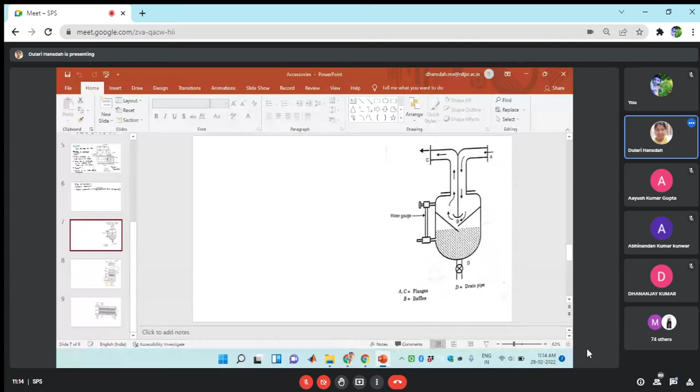Okay, so last class we were continuing superheater. So superheater, we have discussed this diagram. So there we are having the U type superheater. So both the ends are closed with the help of the headers. So one side there will be the supply of the wet steam. This is the steam inlet through the headers.

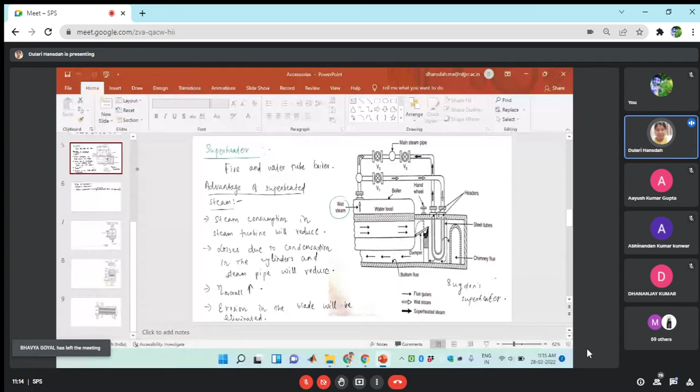So it will take the heat from the flue gases. So here a damper is provided so that proper direction of the flue gas will be achieved by the help of this damper. Okay, so by taking the heat from the flue gases, that wet steam will be converted into the superheated steam, which can be collected at the valve, that is V2, when it is required.

Then here we are having the two valves, V1 and V3. So sometimes if there is a requirement of the wet steam, then that time this V3 valve will be open, but V2 will be closed. And when your V2 will be supplied, that time V3 will be closed. So this is all about your superheater.

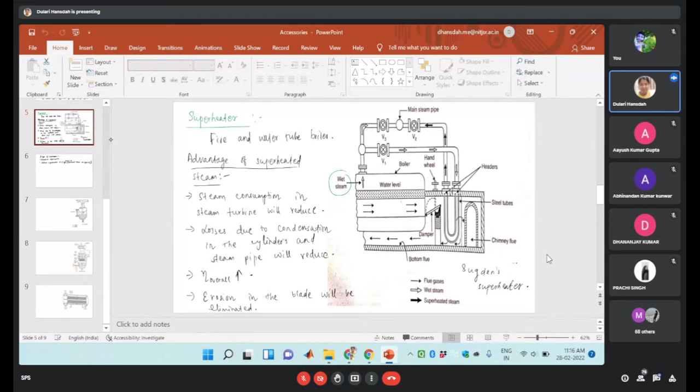So there we are having the two types of superheater. One is the convective superheater, another one is the radiant superheater. As the name is given, convective superheater, so that heat transfer will be the convective process. So this type of superheater will be placed outside of the furnace, and the flue gases will be used to increase the temperature of the wet steam.

And in case of this radiant superheater, it is placed inside the furnace, and this type of superheater is used when there is the requirement of a high amount of superheated steam. Okay, so the heat transfer will be the radiant process. Okay, so then we are having this, the steam separator.

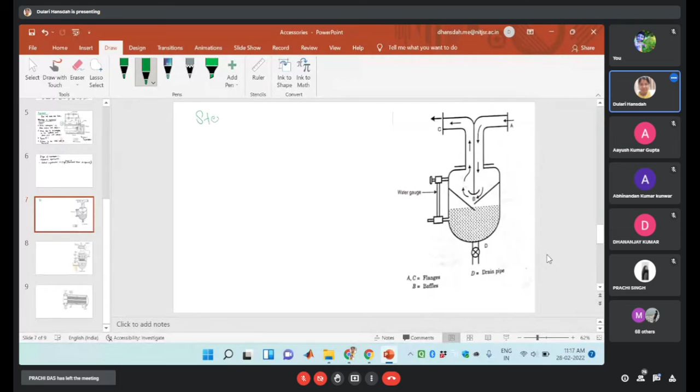So steam separator, why is it required? So sometimes there will be moisture content in the steam. So to remove that moisture content or water content from the steam, these steam separators are used. So a boiler will provide you different types of steam. So those are your wet, dry, saturated, and superheated steam.

Okay. So if it is the wet steam, when this wet steam is supplied through the long pipe, what will happen? It may condense in the pipeline when it is reaching the turbine. So in that case, if that steam is condensed, that will stick to the surface of that pipe, or when it is going to the turbine, that moisture content will stick to the turbine blade.

So it may pose some risks to the turbine blade, or there will be corrosion on the turbine blade. Because of that, the use of this type of steam will be uneconomical. So we have to use the steam separator before the turbine itself, or near the turbine. In this case, it will remove the entrained water particles which are present in the steam.

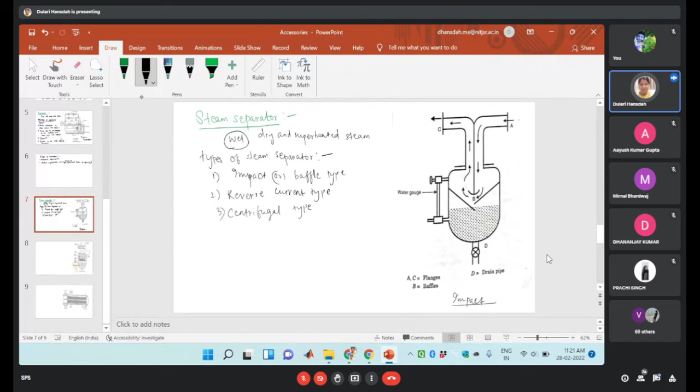The first one is the impact or baffle type. This is the example of your impact baffle type. The second one is the reverse current type, and the third one is the centrifugal type. This is the impact type of steam separator. In this case, A is the steam inlet, and B are the baffles. First the steam will enter through this pipe, it will strike the baffles, and the low density steam will pass through another tube, that is C, and then go directly to the turbine.

If we observe, at the lower place there is a drum where the water or condensate can be collected at the lower position. When the steam strikes the baffle, the high density water or condensate will be collected at the lower portion. Then high quality steam will be supplied to the turbine.

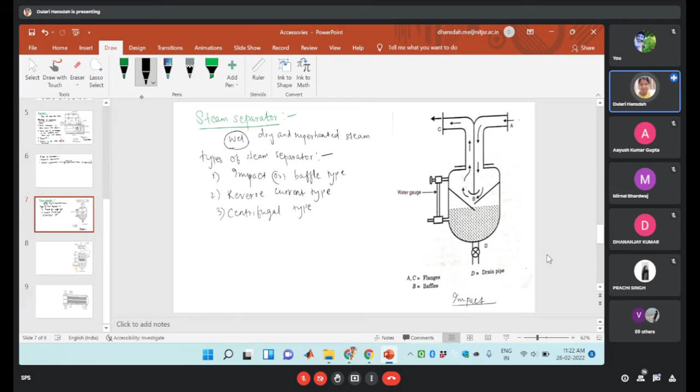There will be a water gauge. It will check the level of water or condensate formed inside the drum, and that will be drained with the help of the drain pipe. D is the drain pipe. So this is the simple function of the steam separator, the baffle type or impact type of steam separator.

Next, we are going to discuss feed water heaters and evaporators. I will only discuss the definition; I'm not going into details. Feed water heaters are required at the inlet of the boiler. Most thermal power plants are designed so that whatever condensate is formed will be circulated inside the boiler itself. Before the feed water enters the boiler, its temperature can be increased so that fuel consumption is reduced and the efficiency of the boiler is increased.

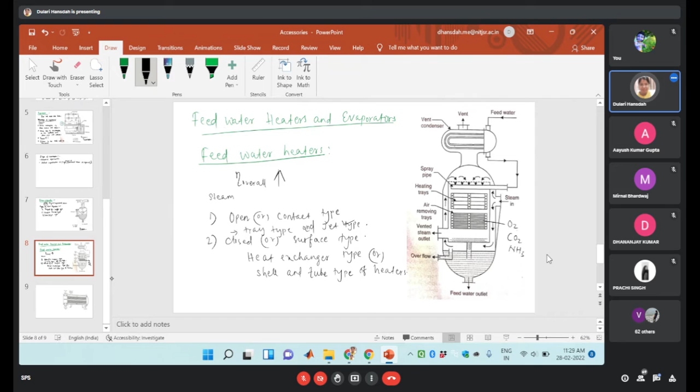So this is all about your accessories. What are the accessories? First one is the feed pump, then we have discussed the injector, then the air preheater and superheater, steam separator, economizer, then feed water heater. Last one is the evaporators.

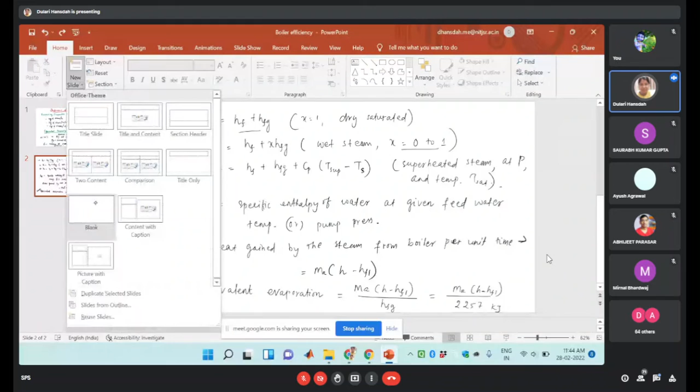So next one is the factor of evaporation. Factor of evaporation is expressed in terms of Fe. So Fe is equal to (H minus HF1) upon 2257. So it is the ratio of heat received by 1 kg of water under given working conditions to the energy utilized to convert 1 kg of water into steam at 100 degrees Celsius. That is the factor of evaporation. In this case, Ma is taken as 1 kg. So that is the factor of evaporation.

Then we are going to discuss the boiler efficiency. Boiler efficiency is the performance parameter of the boiler. It is represented as a ratio, the ratio of the heat actually utilized in the, sorry. Okay, so boiler efficiency is the ratio of heat actually

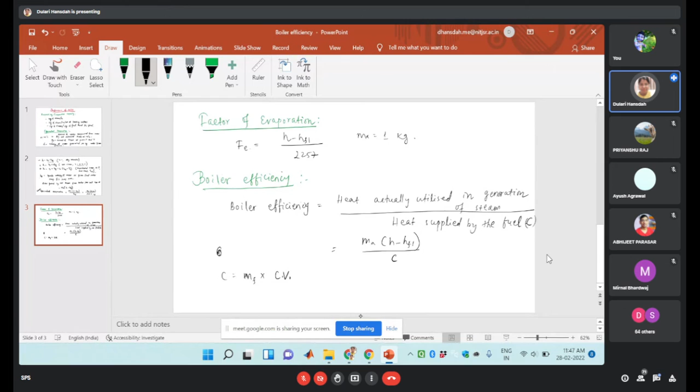fuel. So heat supplied by the fuel can be represented as C. Let me write it like this: Ma(H minus HF1) upon C. So C is mf into the calorific value of the fuel. This is the heat input, the heat supplied by the fuel. Ma, as you all know, is the mass of water actually evaporated into steam, or the mass of steam generated. So by using this formula, you can find the boiler efficiency.

So next one is the heat losses. While discussing the performance of the boiler, we also have to consider the different kinds of losses from the boiler, because they directly impact the efficiency. So there are different losses we need to calculate and include in the overall efficiency of the boiler. So what are the losses in the boiler?

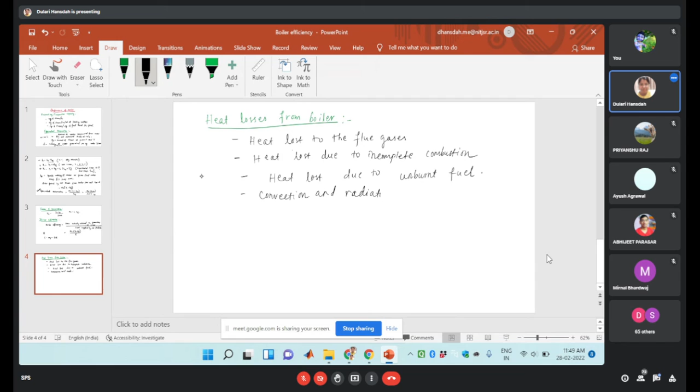First one is the heat lost to the flue gases. Another one is the heat lost due to incomplete combustion. Third one is the heat lost due to unburned fuel. Fourth one is the convection and radiation losses. These are the losses generally occurring in a boiler plant. So first one is the heat loss to the flue gases.

In the flue gases, there are different types of dry products of combustion, which we need to include for the calculation of the overall efficiency of the boiler. So heat loss to the flue gases, or heat lost through the dry flue gases, can be expressed as Qg. So Qg is equal to mg Cpg (Tg minus Ta).

Tg is the temperature of the flue gases, and Ta is the temperature of the air entering the combustion chamber or furnace. mg is the mass of dry gases going to the atmosphere, also known as the mass of the flue gases. Cpg is the specific heat of those gases. If these values, mg, Cpg and Tg, are known, we can easily calculate the heat loss to the flue gases. Okay. So there is another term, that is the heat carried away by the steam in flue gases.

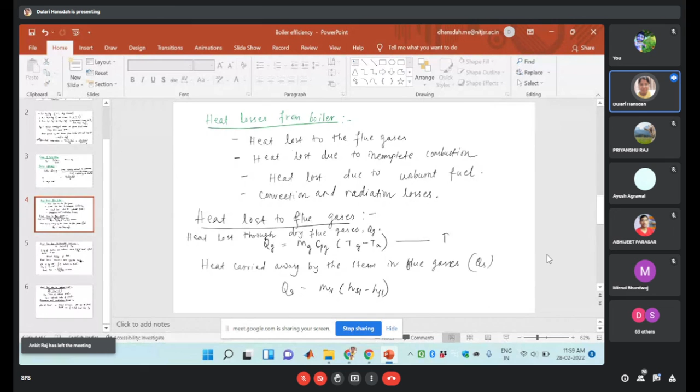I'm not writing the whole sentence, so you can write it down by yourself. So this is the loss of heat by the convection and radiation process. This is the formula. So this is all about boiler efficiency.

Day after tomorrow I think I'll take one more class, and I will teach you about the chimney draught system. Two types of fans are used: induced fan and forced fan. How the efficiency of the chimney can be increased and the draught process I will explain, and certain equations used to find out draught efficiency I'll discuss.